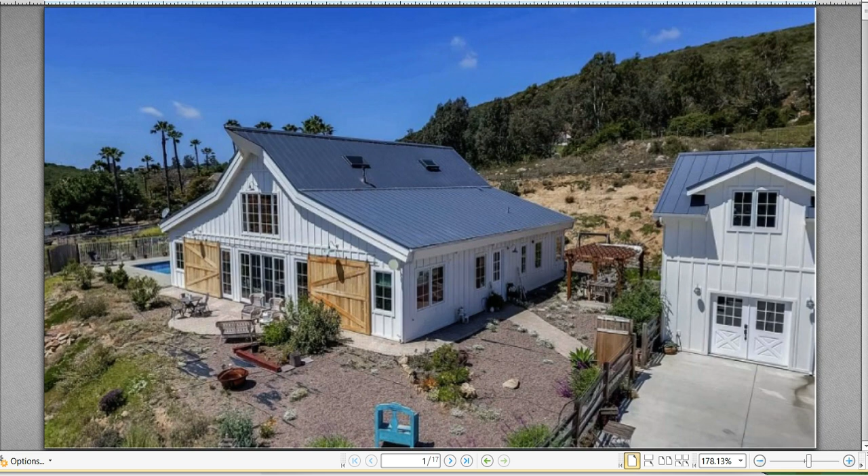Hey guys, I am really excited for today's video. I've been working on your 3D massing models for quite some time now, and I've got a lot of exciting options for you guys to consider and discuss further.

I want to start here with some of the inspiration images you've provided over the course of the project, as a reminder of how I started my approach looking at these 3D models for you. There's been quite a consistent expression for a farm style home, a barn shaped home.

With either a gambrel roof, this sort of double gable roof, or this dual pitch roof style. I took that to heart and really tried to take a lot of inspiration from these.

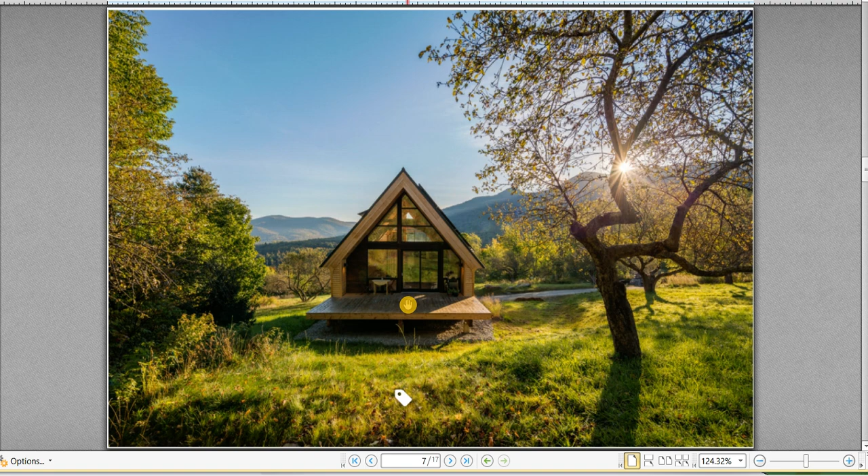And you've also got these other really interesting A-frame style homes. Now I know we discussed this previously and you said you didn't feel the need to pursue the A-frame home, but I couldn't help but explore it a little further to see if I couldn't make it work.

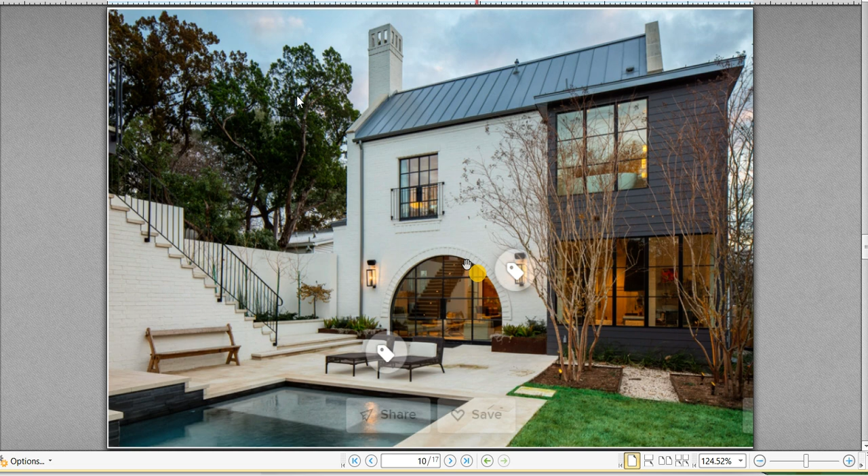You've also got this image here - I think you thought it might be quirky or fun to have these whimsical round doors. I didn't quite work this particular element in, but we could talk more about doing rounded elements like that elsewhere. This image here...

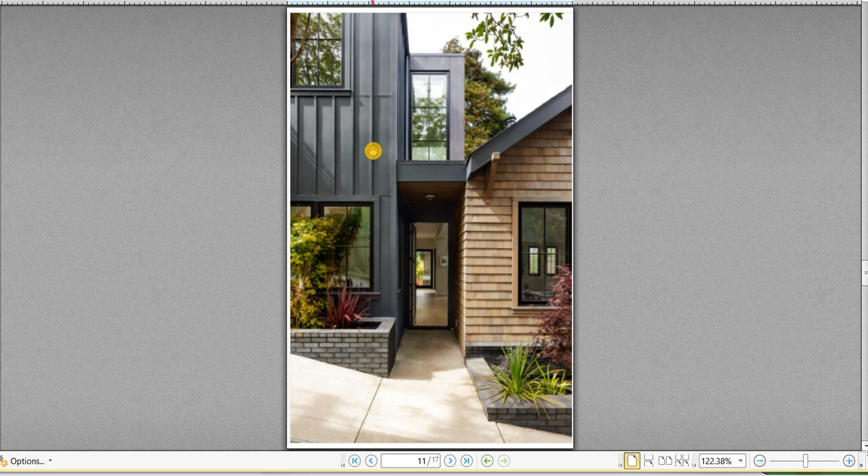You're going to find that I definitely fixated on this as sort of a color palette. I've got a pretty consistent theme going where I'm using these tan colored shingles, whether real wood, which I wouldn't recommend given your...

wildland urban interface, your fire hazard zone that your house is in. I'd recommend going with a stain grade looking artificial shingle, like a cement fiber shingle. That would give you a layer of fire defense better than wood, but still the shape, texture, and color could be very much like this.

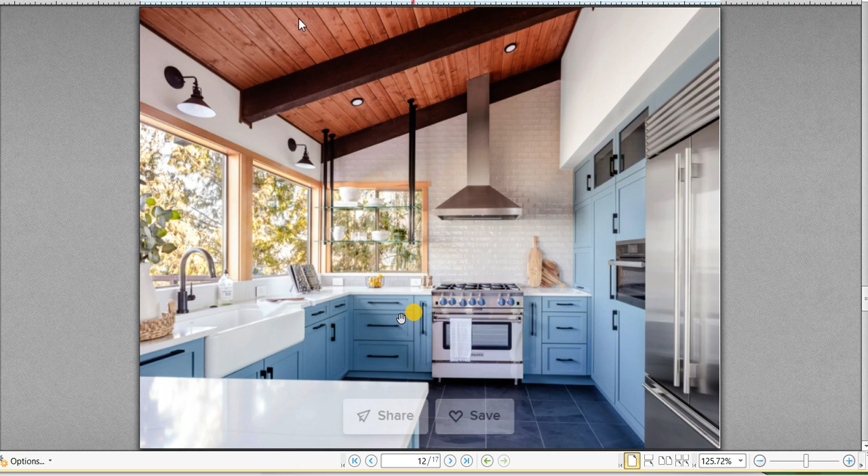And then some vertical board and batten, colored darkly, perhaps a dark gray, again made out of fiber cement. And then lastly, maybe another color of this material, but in a blue theme, because I noticed again and again that a lot of your images talked about liking light blue.

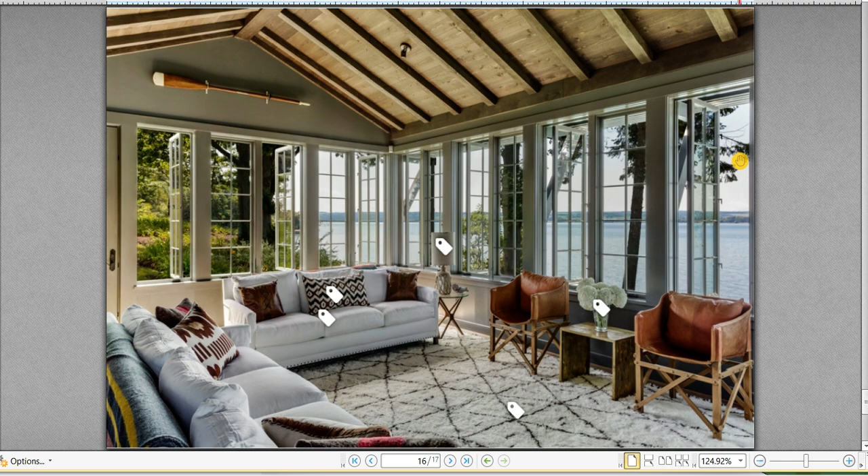Some interior shots for just some really nice colors, really grand gestures here - big walls of glass, lots of glass, very interesting, vaulted ceilings. Really gorgeous images here, and I want to thank you for providing these.

So now let's take a look at where we were with the floor plan that we had developed. I know there are a few things we're still iterating on, specifically with regard to lengthening this room here. I think we should talk more about that.

But this was the basic layout that we had, with entering in on the great room that's meant to be vaulted or very tall, bedroom wing off to the left, garage, playroom, mudroom here, and then of course the detached ADU.

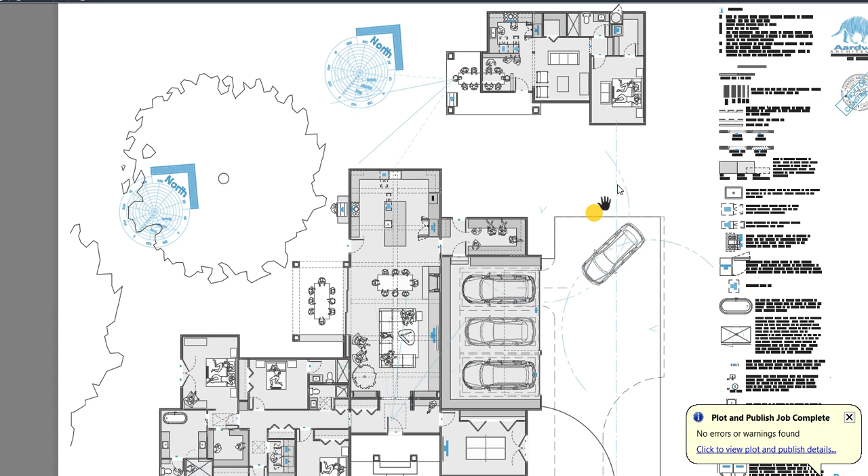I didn't get into exploring the shape of the ADU. I'd like the ADU to take its cues from the decisions we make for the main home. So it's really just blocked out, and I haven't even studied yet whether the porch should be on the left here or at the front here. Let's figure out what we're doing for the main home first, and then this will copy that.

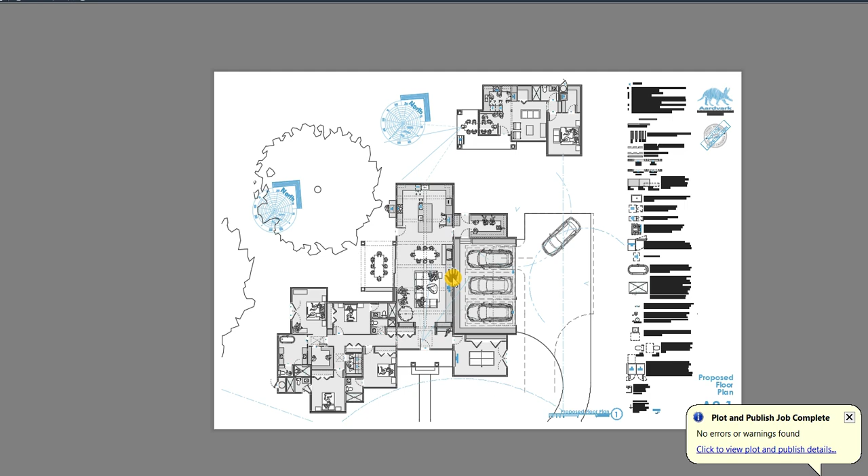Okay, so let's jump into the 3D models. Okay, hold on, so we're supposed to start on this tab here.

So what I've got for you are 5 different studies that I think are worth exploring and discussing in terms of pros and cons. And then I'll take your feedback and we'll generate the next scheme that may be a hybrid of some of these different ideas.

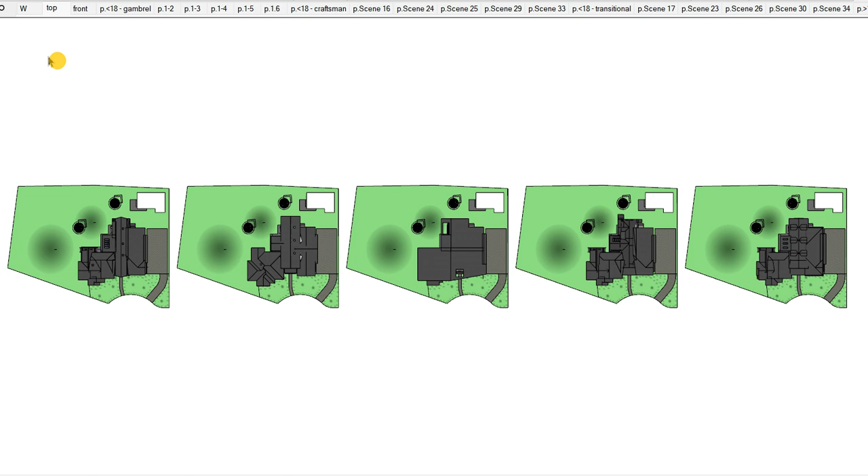We'll see. So we'll come down here to the front and then zoom in on study number 1. Again, I couldn't help but fall in love with the idea of doing a Gambrel style home for you. I really like sort of what we're seeing here.

It is right at the 18-foot height limit that the city defines, which gives you about a 16.5-foot interior ceiling height from the finished floor to the underside of the ceiling, which I think is really great.

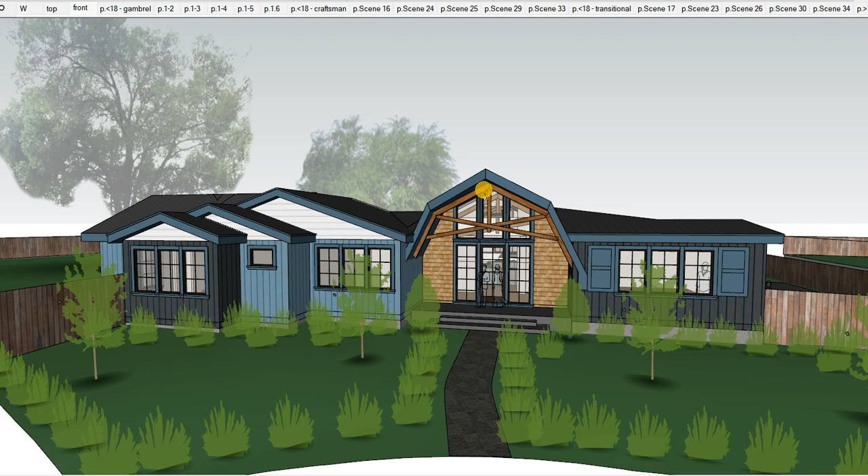I think, though, this does stand out as a bit different from the neighborhood, and so if we do exceed the 18-foot height limit, we might have a tougher time getting this approved. I think it's really interesting though, so I'd love to get your thoughts on this.

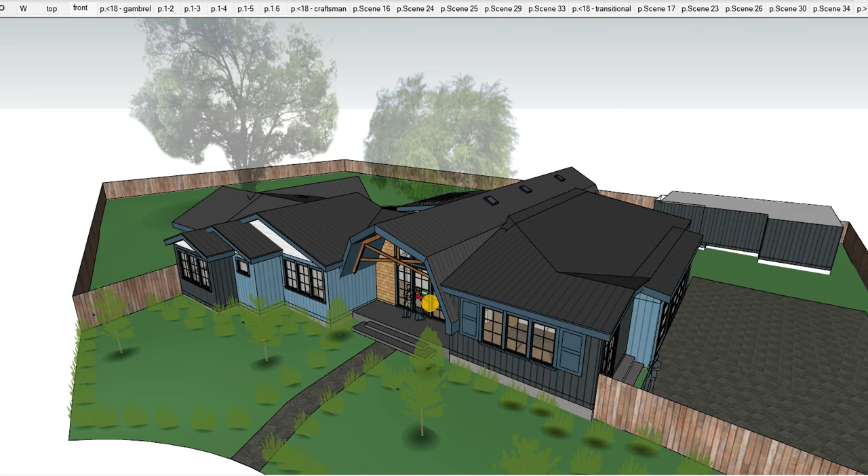As we look, we've got the bedroom wing over here, and I've really tried to take cues from the neighborhood on how to roof it. I think tying in with some simple gables or hip roofs would be the right way to go there. You'll see that as a general duplicated motif for the other studies.

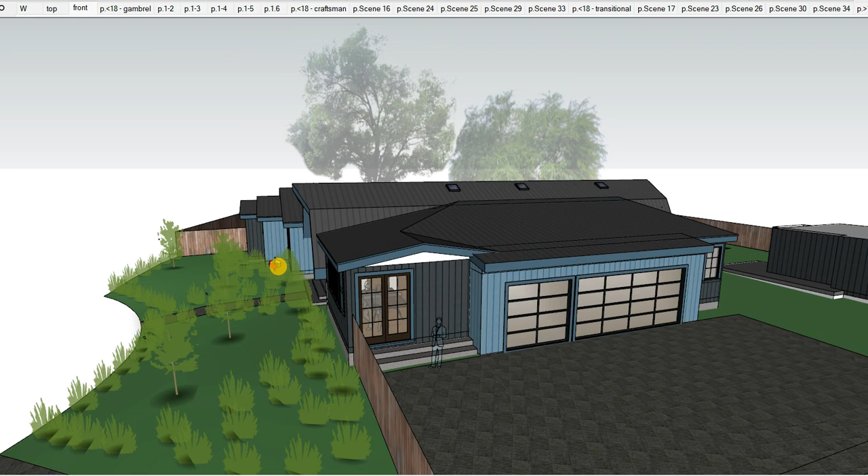Here we're seeing the flex room and the garage. A couple different ways this could be done as well, but I think it's important that this area takes its cue from the purpose of the main room or the great room roof. So more on that to come.

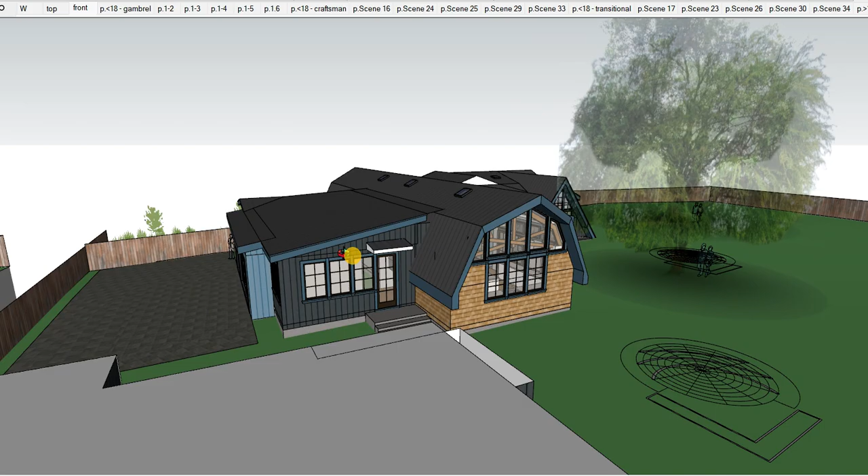Here at the back of the kitchen, I think this is really phenomenal - a really special home for you guys.

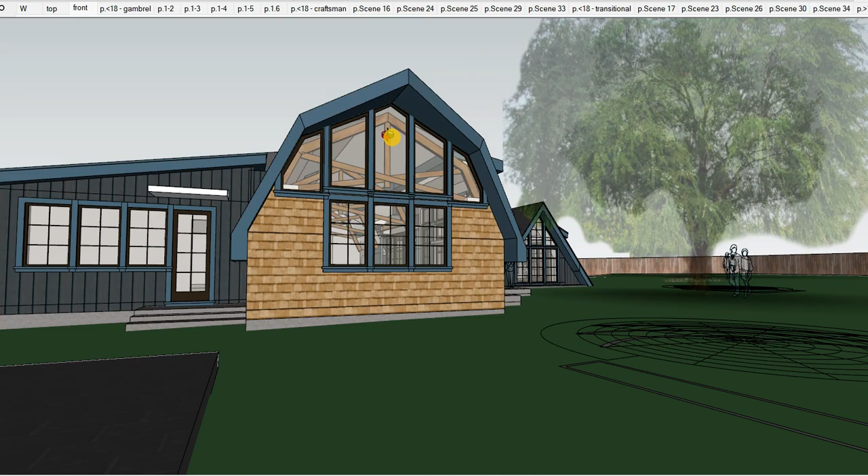The concern I have is that the images you've shared with me look more like converted barns rather than building from the ground up. So maybe it's something you ultimately don't want to do. But I still wanted to show it to you because I think it's really cool and quite feasible.

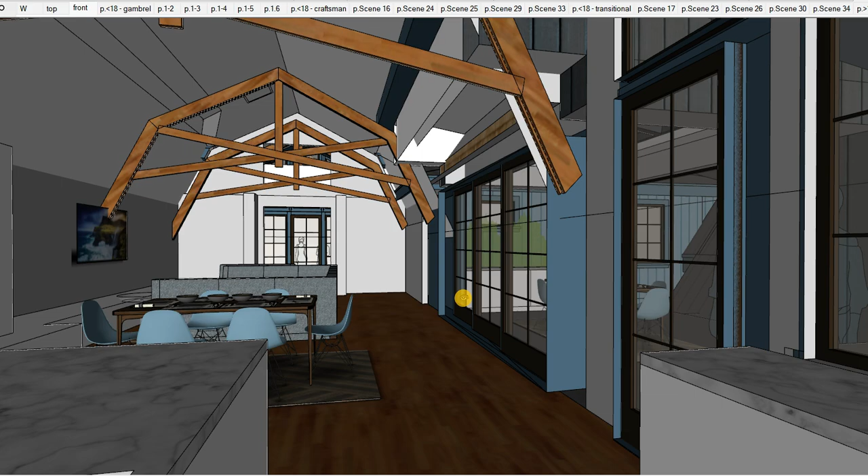Now, I don't want to overpromise on the interior aspects of this. There's a lot of cleanup that has to be done, but just as a concept of building this and expressing some trusses, adding some interest to the interior rhythm of the ceiling could be really special.

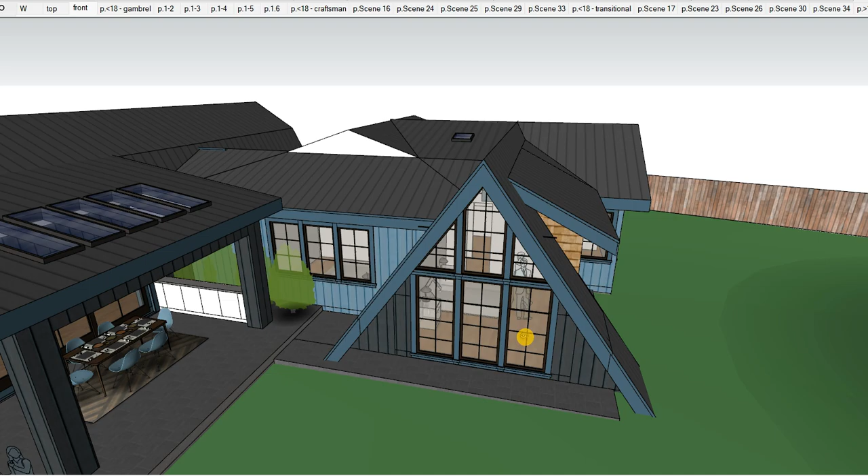Another element I wanted to incorporate was the A-frame element of your inspiration images. So I thought a perfect place to do that as an accent would be the master suite. You'll see this again and again copied. There are other ways to do this, but I really think this is special. These little wing walls could be extra storage cubbies accessed from the interior, although you might want to reserve this length of wall for furniture. I think it's really cool.

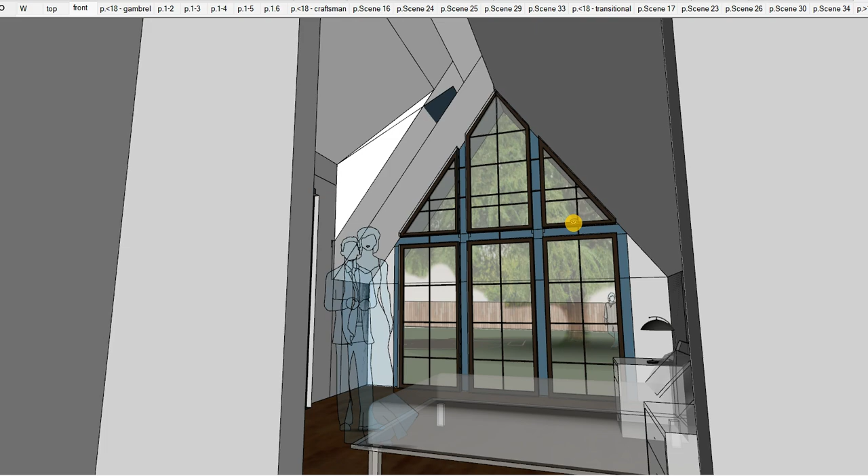And it still gives you some pretty dramatic spaces and views, of course. Something I've been talking about for a long time would be the view when you come in from your master vestibule and you look out and see that oak tree. I'm so happy with this as a concept.

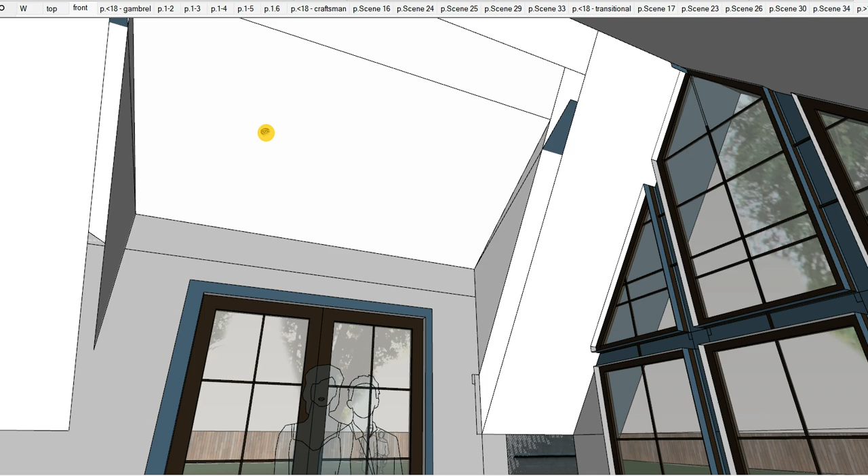And then, looking out here, I'd love to have a big skylight right here. I think sitting under the crown of this oak tree, it would be a shame not to look up and see that. But I know you're a little against skylights, and I don't blame you—that's the first thing that's going to leak in the house, it's going to be the skylight. But when we've got an impressive canopy to look out onto like this, I think it's worth doing sometimes.

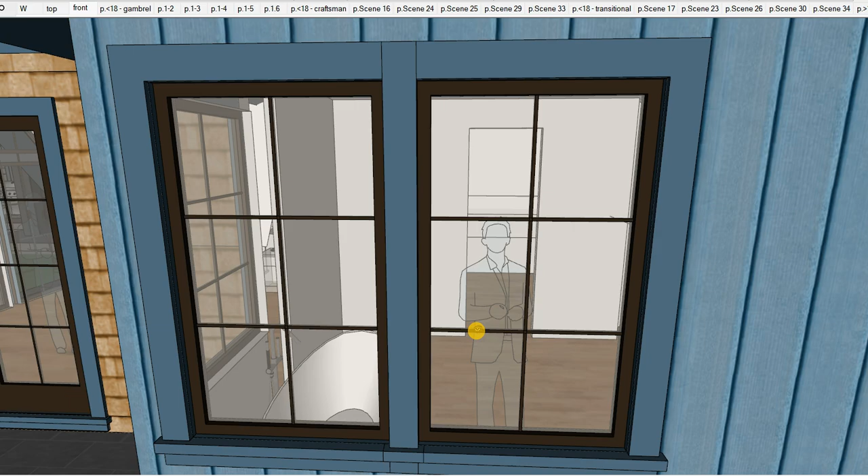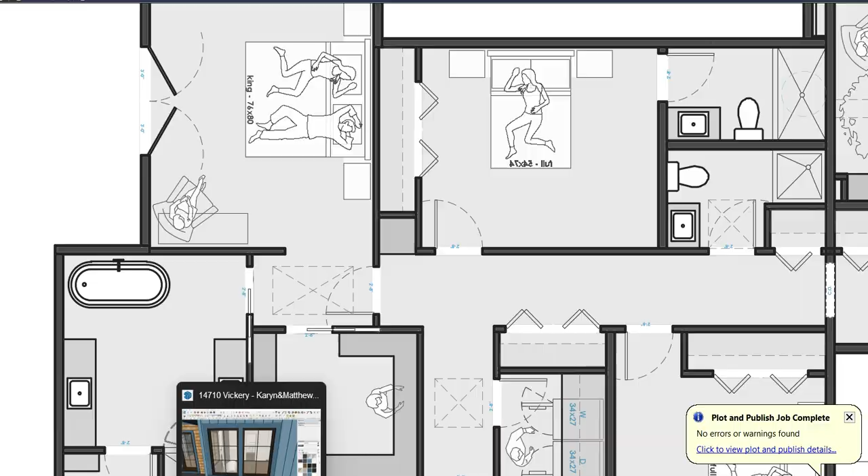A couple windows at the tub here, and we could do some of those bottom-up shades, so I'm not concerned about privacy, although I do want to talk about the access into this room. I don't know if you recall from the floor plan, we've been showing the door into the tub directly across from the tub. I feel like this is worth exploring—that we move this door down, because I don't want to turn the corner and look down the open door and see your tub. Even though it's going to have a nice view beyond, I think it'd be better if this was solid wall with a piece of art or mirror on it, but we could talk about that in more depth after we fixate on an exterior look here.

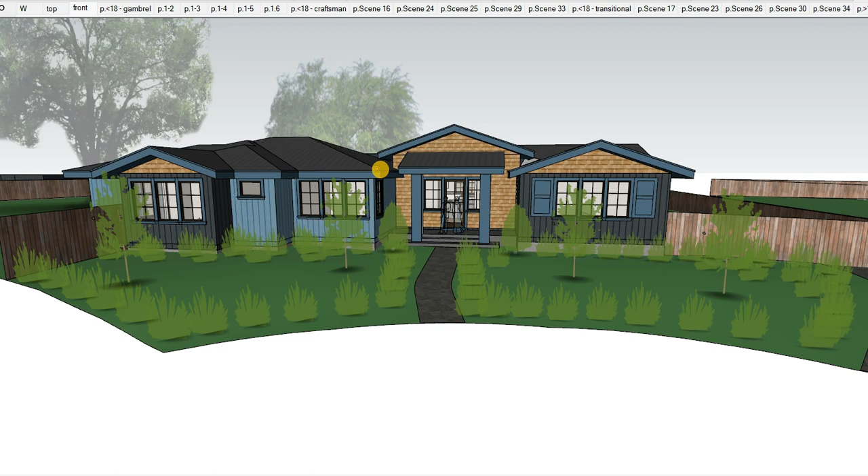So that's about it for this scheme. Let's move on to another option, which would be a far more traditional, neighborhood-contextually sensitive design where we're really just relying on hips and gables. And we're staying under 18 feet still. This is not as exciting of a design, but it's certainly probably the simplest one in terms of the approvals process.

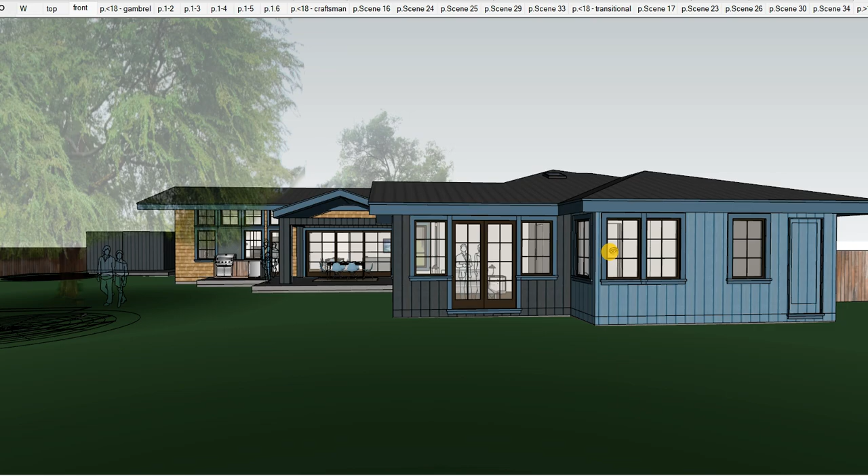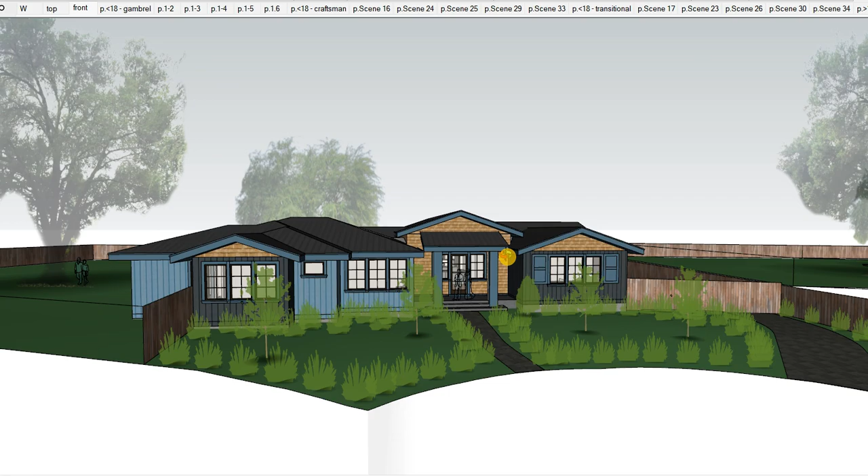This is a fantastic home. There's nothing here that I would say would be a mistake or a misuse of this opportunity. But it's certainly playing it safe. And I think, as we've talked about before, we're more interested in getting a final product that is great for you guys. And if we have to go through a longer approval process, so be it.

But some of the designs I'm going to show you might be tough to do when we go through that sort of process—before we move on here—might be tougher to do when we start looking at more extreme designs that are taller.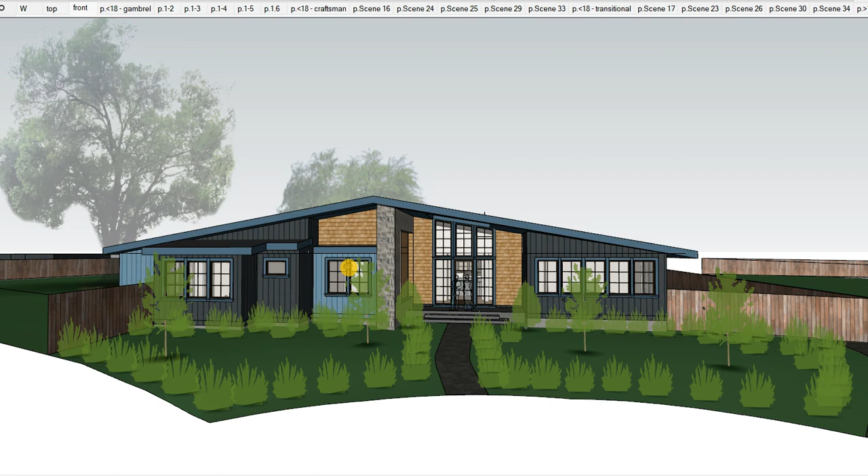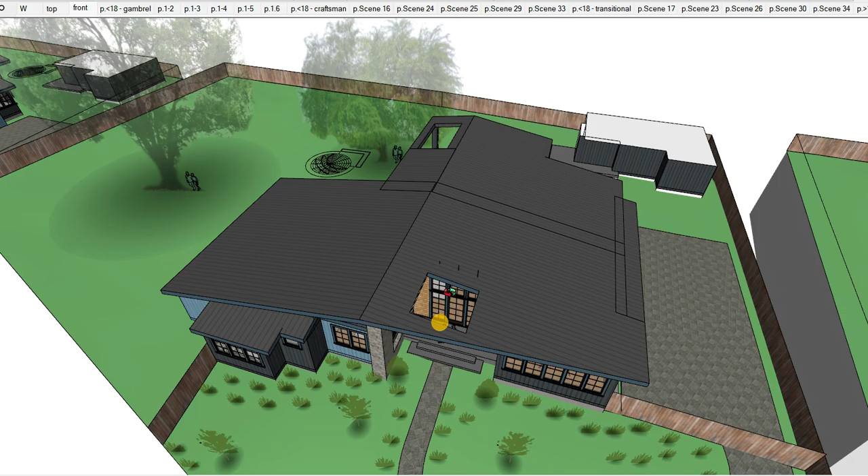So here's one more option, and I think this one's probably a bit of a throwaway. This is study number 3, and I'm calling it the transitional design. This has the simplest roof—one large gable roof at a 2 and 12 pitch to take advantage of that metal roofing you've already expressed interest in having. It's going to be the easiest roof to build and the easiest one to maintain. It gives you so much southern-facing roof exposure for solar panels, but I doubt this is at all your cup of tea based on the images you've shared with me.

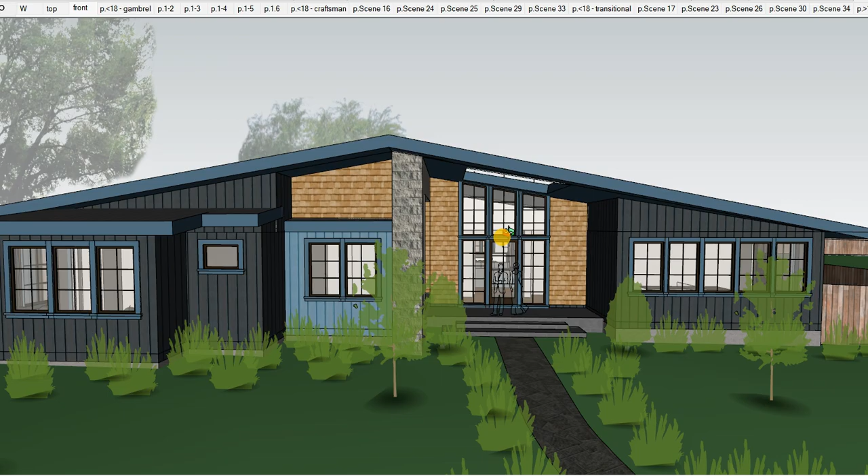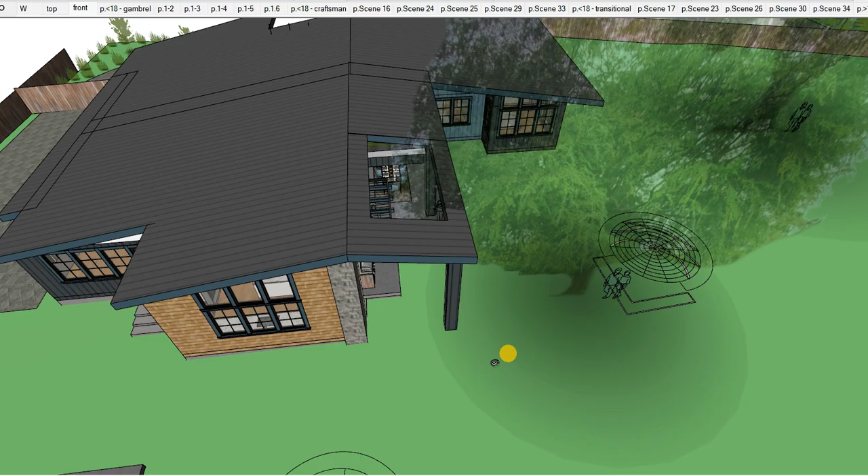However, I think there's some merit to it. There's certainly a lot of different ways we can tweak this, but I had to try—I had to take one crack at it. One thing I really don't like about this one is that I felt compelled to bring this roof return all the way over here and support it with a post, but that's within the drip line of this tree here. If we wanted to go this route, we'd have to get the arborist to look at that and give us his advice. That's only if you even like this sort of design idea.

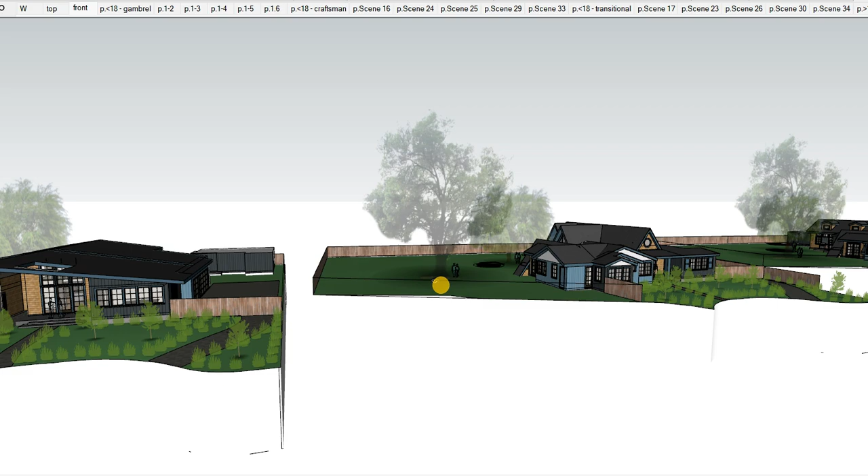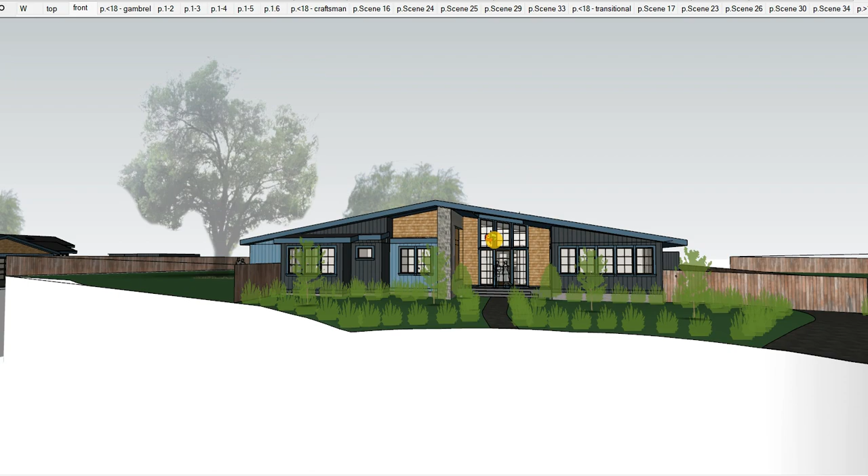So here, setting this at 18 feet would mean less design review oversight. There'd still be some at the staff level—they could still say this giant single peak isn't in keeping with the rest of the neighborhood, which relies more on having a bit of a hip roof at the front. But there's only so much they can do at that level.

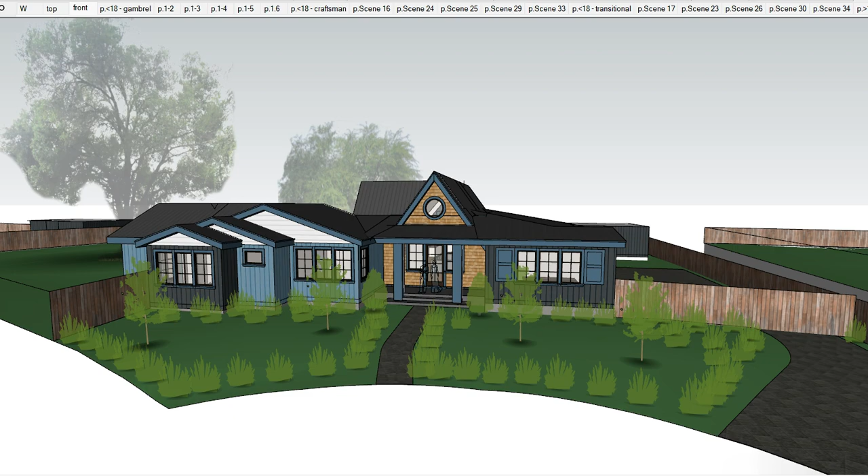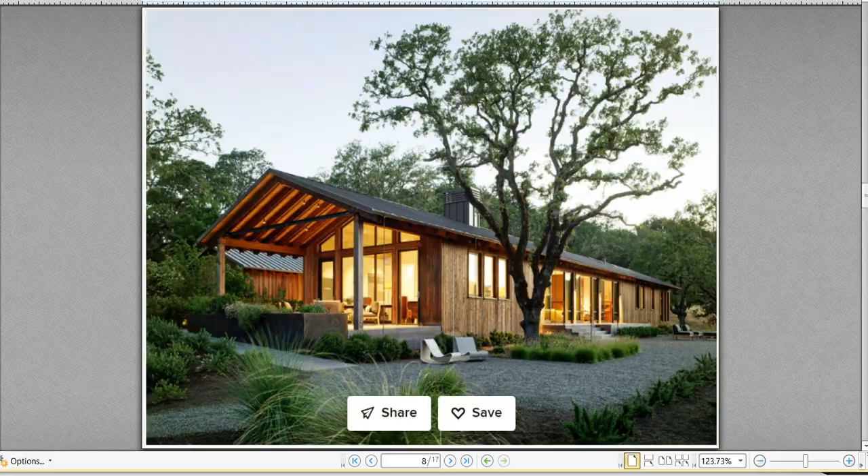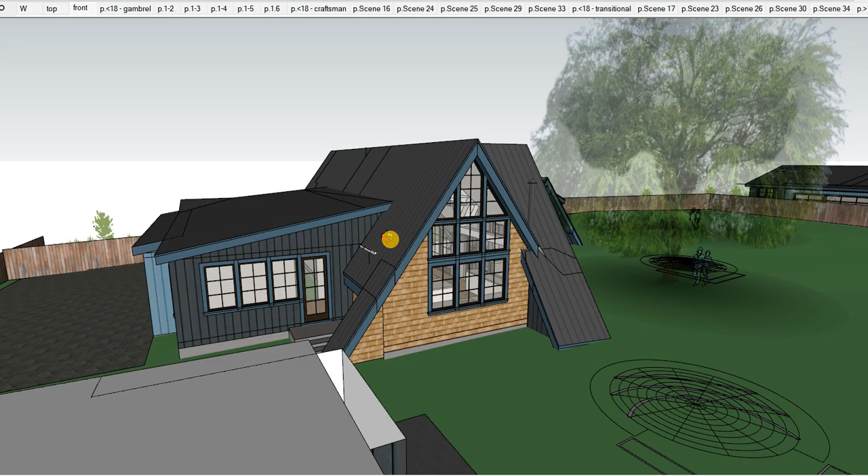That if you wanted to do any of these three designs that are less than 18 feet tall, it should fly through pretty easily. So here's a design where I really took the A-frames you guys were showing—you had quite a few images with these steeply sloped roofs with glass going all the way up to the ceiling. I really wanted to make something like that work, and I'm excited about this design. Here we're seeing the tip of the A-frame peak expressed all the way up to the front of the entry. As we turn the corner, we start to see the A-frames happening at the great room, not just the master suite. I really like this—there's a lot of interesting things going on. Of course I started like I've been doing with the great room vault running this way, and built up all this tall glass here.

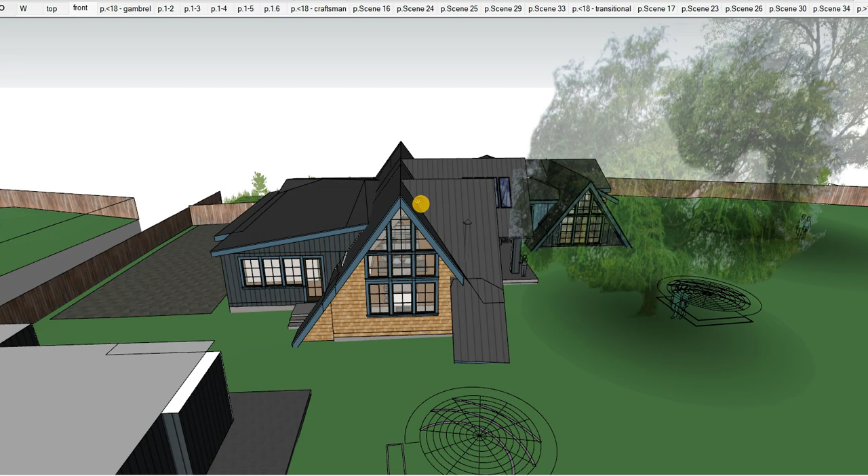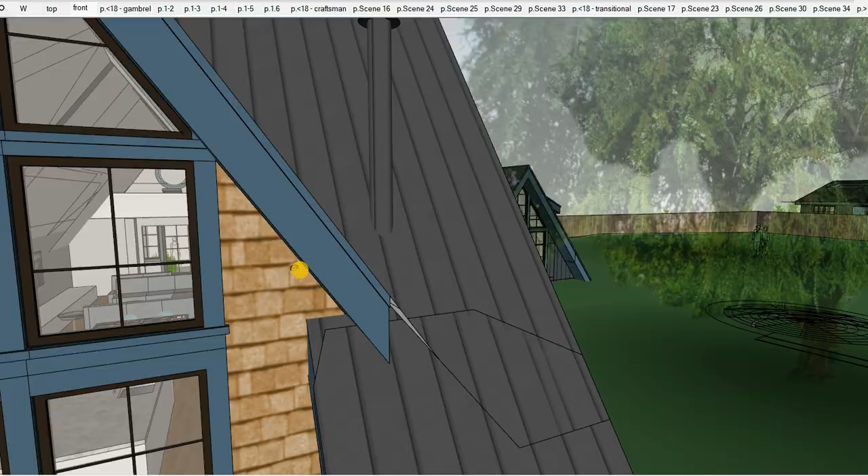When I was standing inside the space, I thought, gosh, I wish there was that tall elm tree right here—I'd love for this to be looking out this way at that tree. So I quickly mocked it up. I said, what if I turned this face, what if I copied this face and did a cross gable? I think it's very interesting—perhaps taking that A-frame design and elevating it into more of a transitional feel, because there's a lot of contemporary things happening here, where we've got one coming down to the ground but stopping short here.

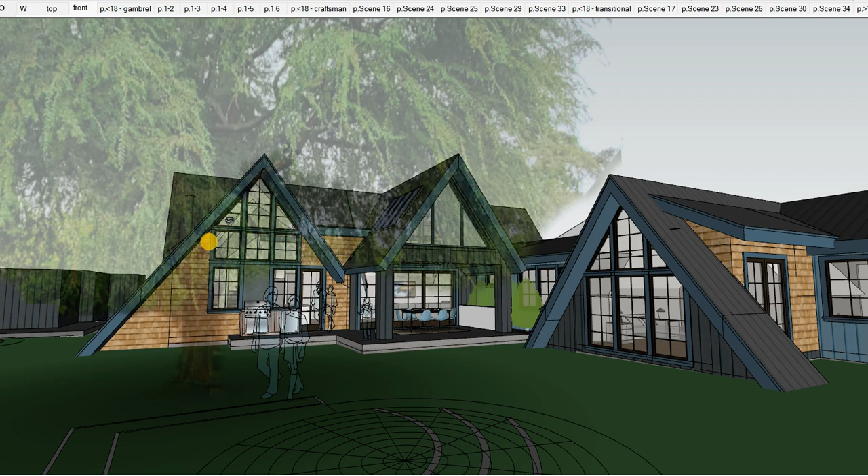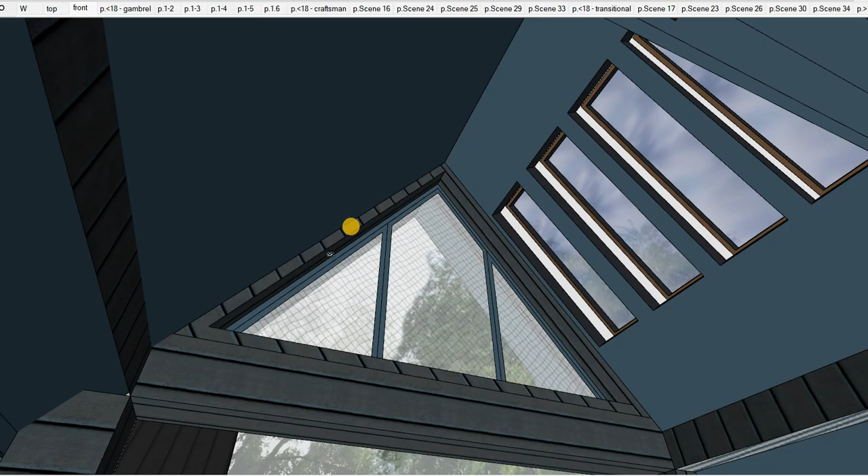Then the giant A-frame at the covered porch, where now we've got a really tall thing happening at the porch too, at the dining room, where you look out and see there's still a lot of structure. I'm not entirely sure if capturing this tall of a vaulted space for the covered porch is appropriate, but I absolutely love it here at the kitchen, and of course at the master suite too. So I thought it would be interesting to try that here and get your take on it.

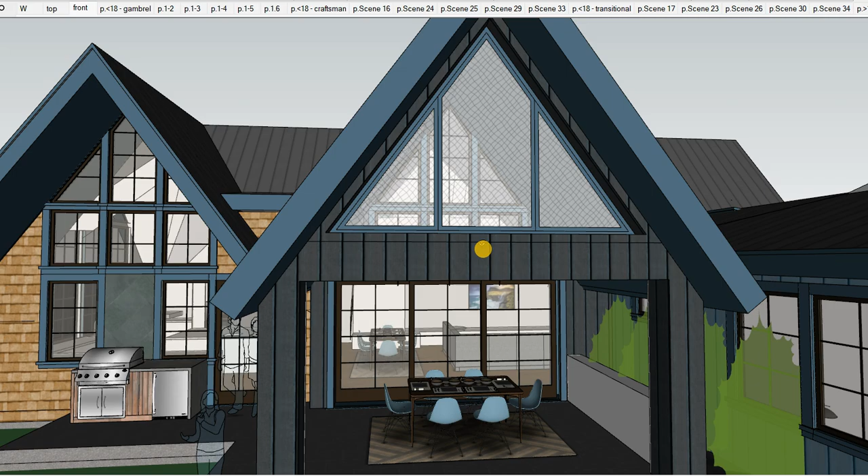This would be a solid screen that's always in place, and then the drop-down roll-down screens would drop from here, from this soffit, and another one here to close off these three elements. This could maybe even just be a solid screen that's always down—we could talk about that.

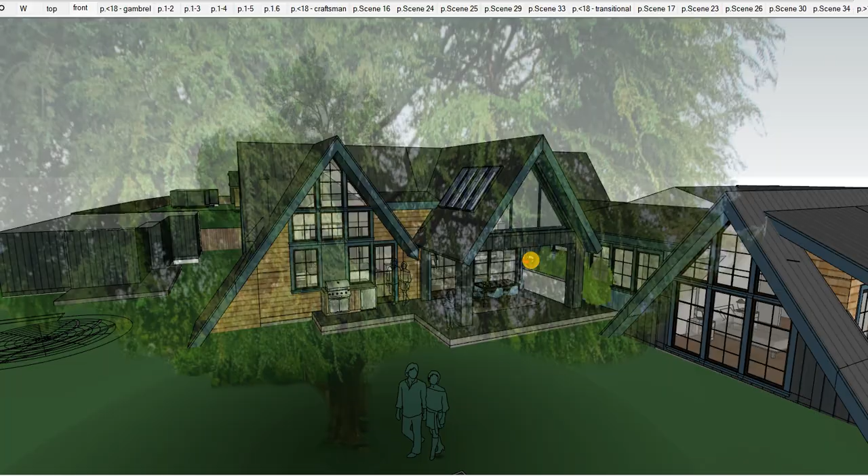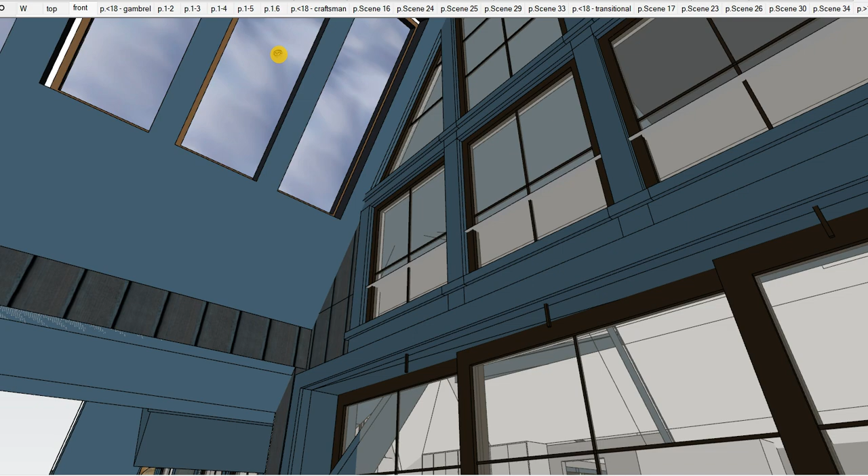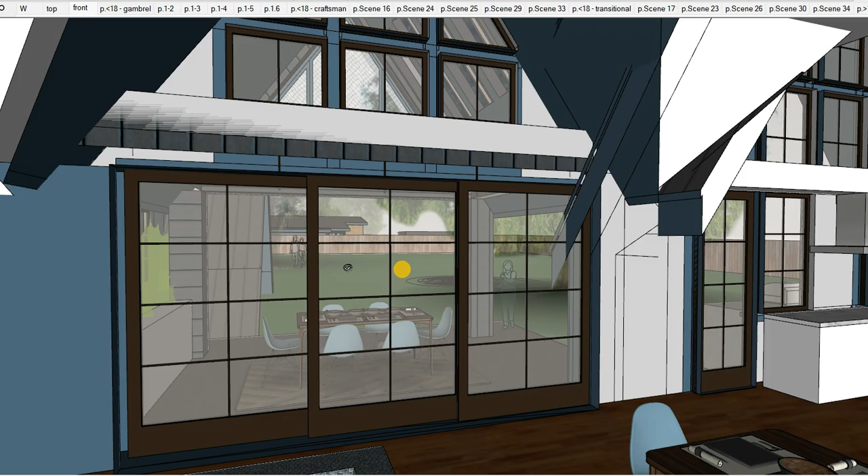I think this is a really interesting concept. When you're sitting here at the head of the table in the covered porch, I'd feel like it'd be a shame not to have this be really bright up here. So these skylights would be part of this covered porch element, so you still get a chance to see and appreciate the canopy, and also to bring light into all these high vaulted ceiling windows. It'd be a shame to just have this all be solid—like this view is fine, but there's nothing to look out at on this side. Whereas these skylights will bring a lot of light into this covered porch area and in through these huge sliding pocket doors.

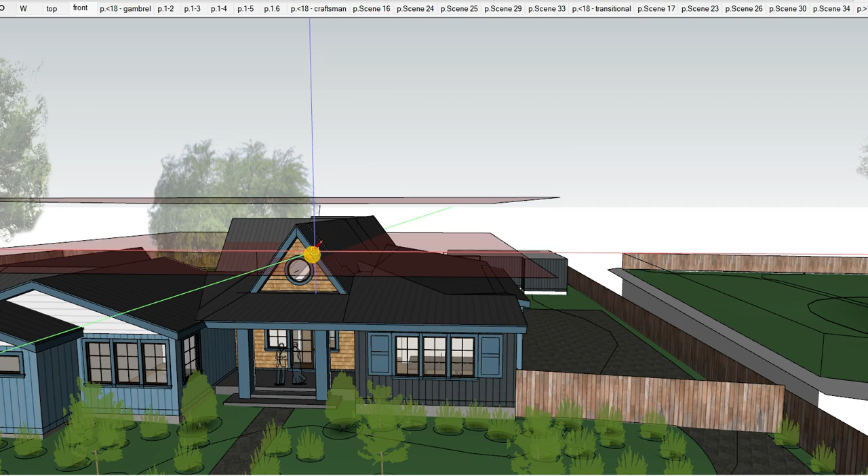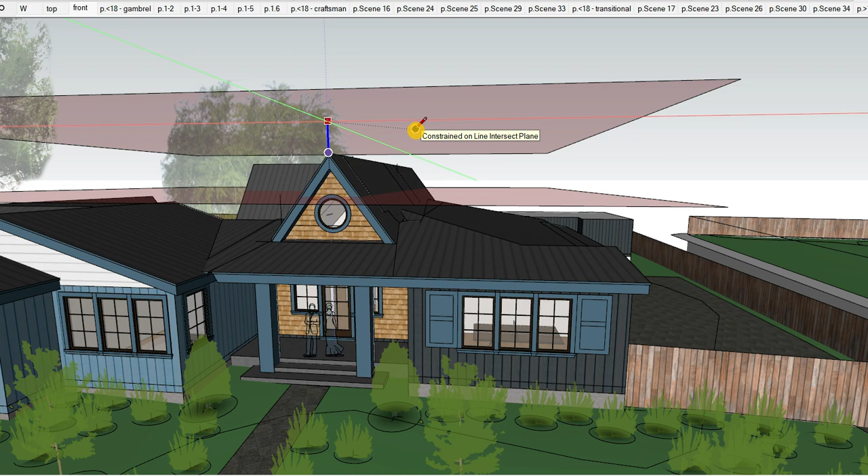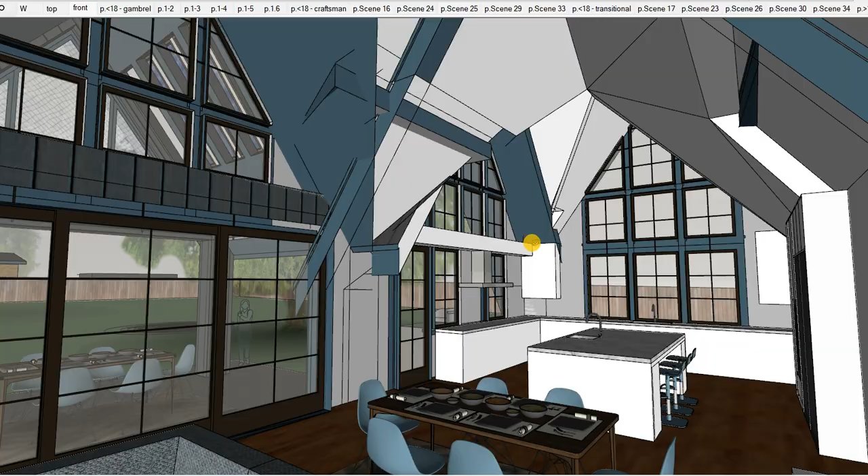Okay, so I think that's study number 4. And this one is a bit taller, right? If we look at how the city defines height, this lower red plane marks the 18 feet from the average of this grade and the average of a grade point back here. 18 feet up from that represents their maximum height limit. This one exceeds that by about 5 feet, but we're still well under the max height limit of 26 feet. This really has the opportunity for some very high expressed ceilings—perhaps too high, perhaps too tall. But I think this is something you guys might like.

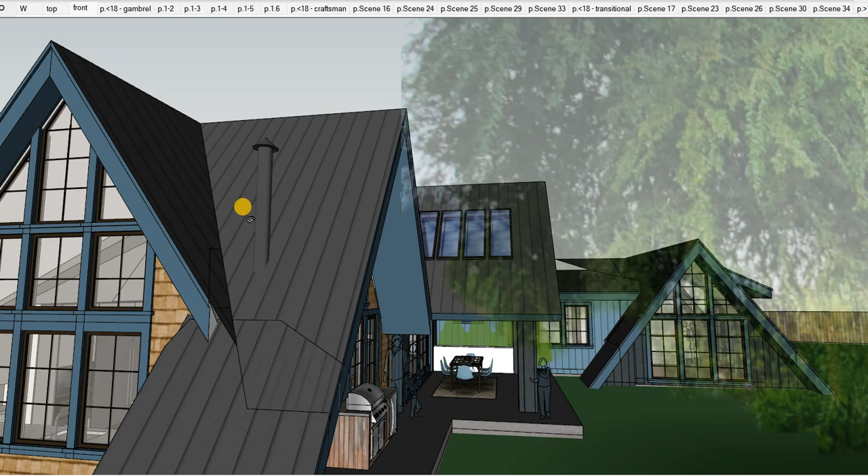So this is where the cooktop is, but there'd be some sort of cabinetry element between these windows that would duct the cooktop through a flue pipe expressed right here. I think this could be a cute sort of cabin-y type thing that's strutted and strapped. This can get a little bit taller, and it could even be painted in an accent material and play it up—it could have been this blue too.

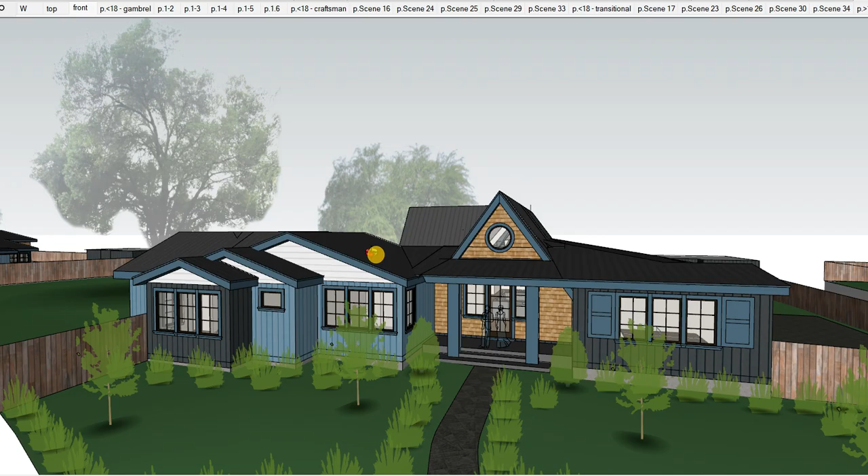I'm really curious to hear what you guys have to say about this design here. Of course, this one going through the Planning Commission and being a bit different might be a bit of a push, although I don't see who we're negatively impacting here.

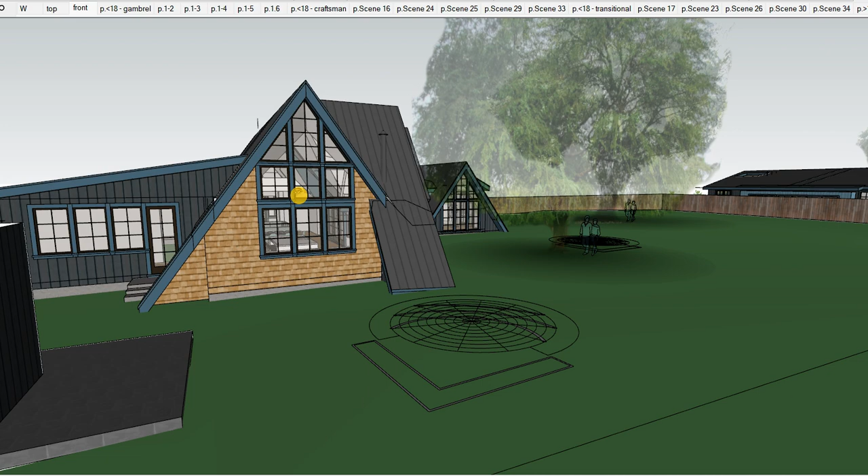It's single story, super tall, but single story. There's not a huge impact to the neighbors' privacy. By having these super high windows here, no one's standing up at this level looking out. You're still just standing at floor level here, looking out at the fence. That's not too much of an impact on their privacy.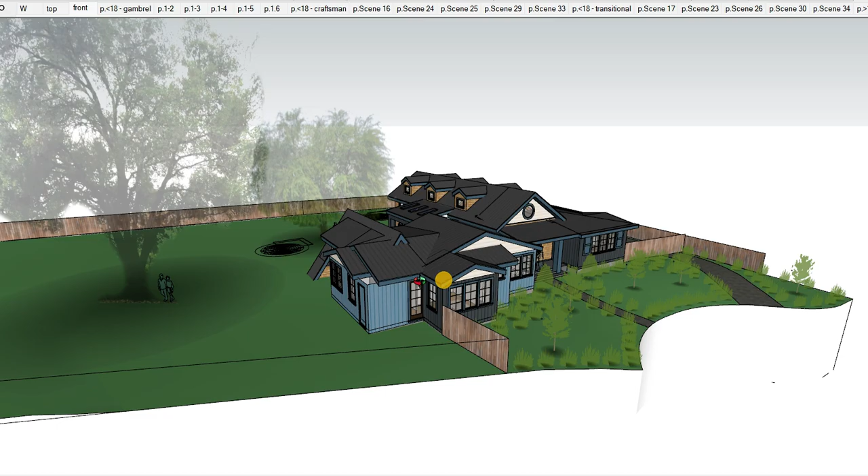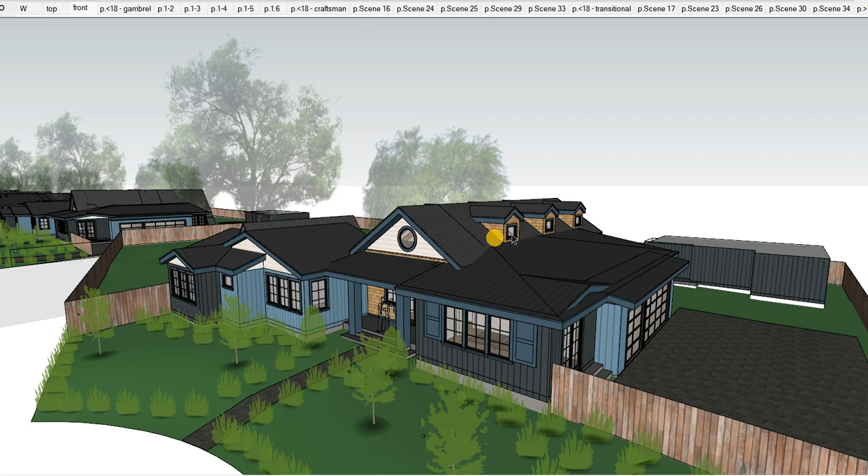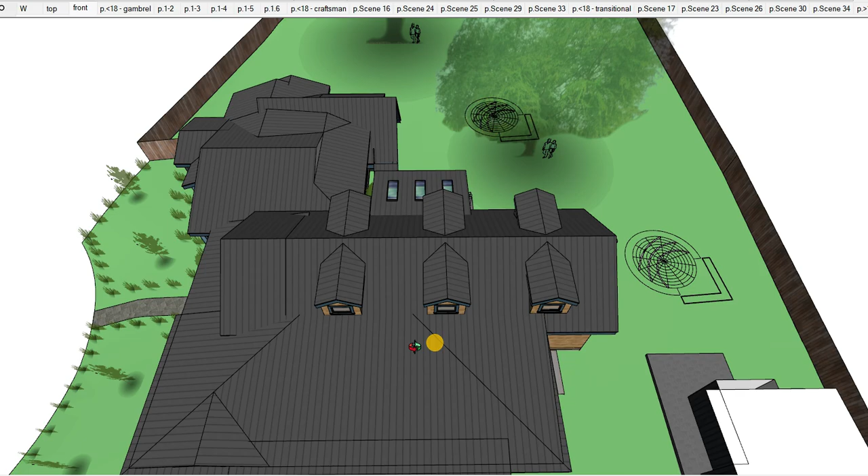So this next design takes the simpler, less extreme approach for the roof. This looks a little like that safe Craftsman version I showed before for study 2, but it pops up. It says let's make sure we can work some dormers in. So let's pop this up to a height above 26, or above the 18, by about 3.5 feet. But doing so, and going with an ultra low slope 2 and 12 over the garage area, does allow us to get these 6 dormers equally spaced inside the great room, and I think that could be pretty cool.

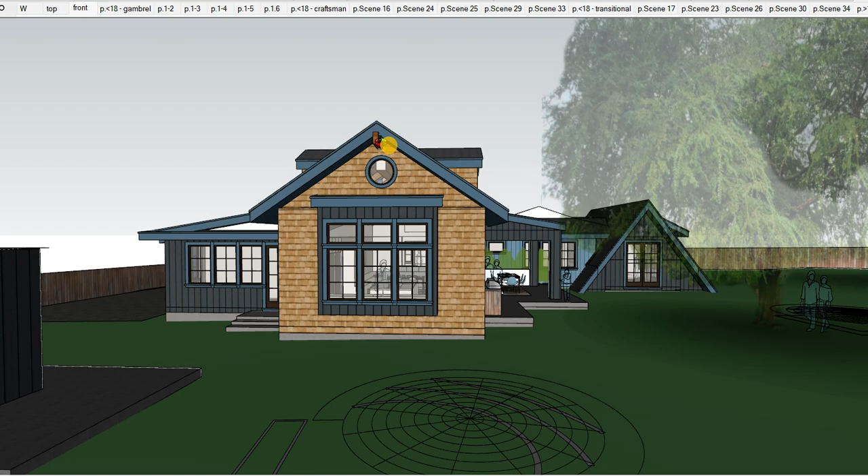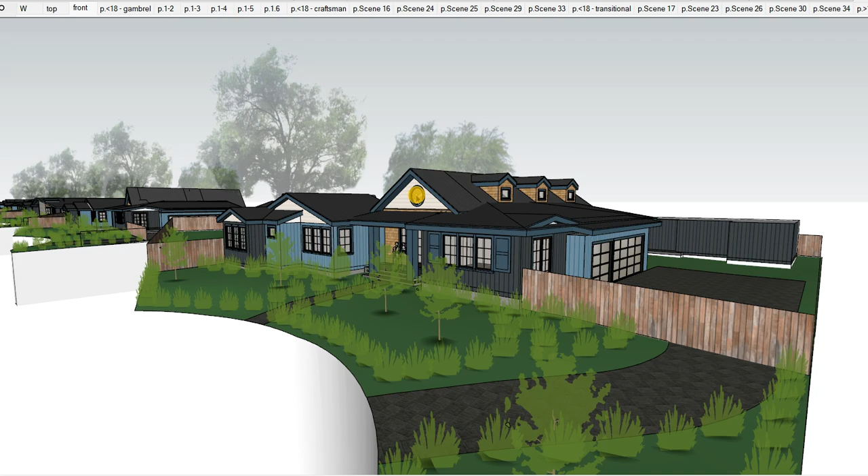This one's okay. Based on the images you shared, I'd love to hear your thoughts on the A-frame, but this one's also really great, perhaps a bit safer, because the roof slopes aren't as extreme, and with the same logic we used for the tall A-frame home, this extra height isn't really impacting the neighborhood too much. We've got a lot of low sloped, low single story elements surrounding it, and we're pulling back the tall elements far from the setbacks. So I do think this should be good to go, or easier to get through the Planning Commission with. But that's just a really soft opinion there.

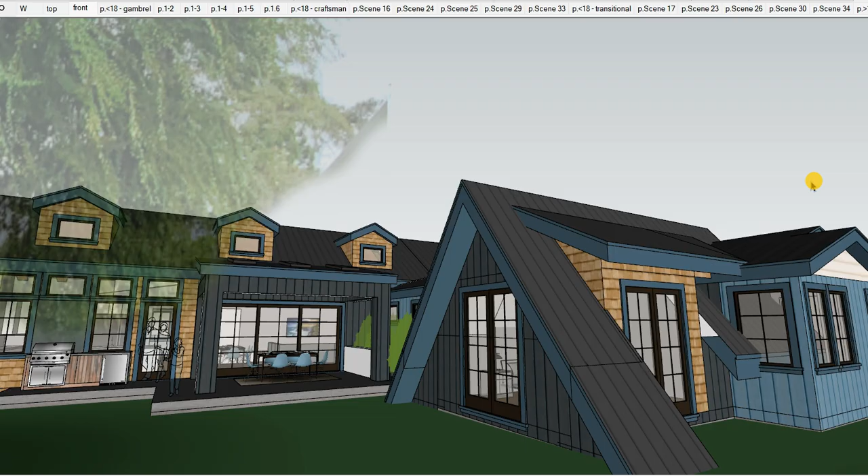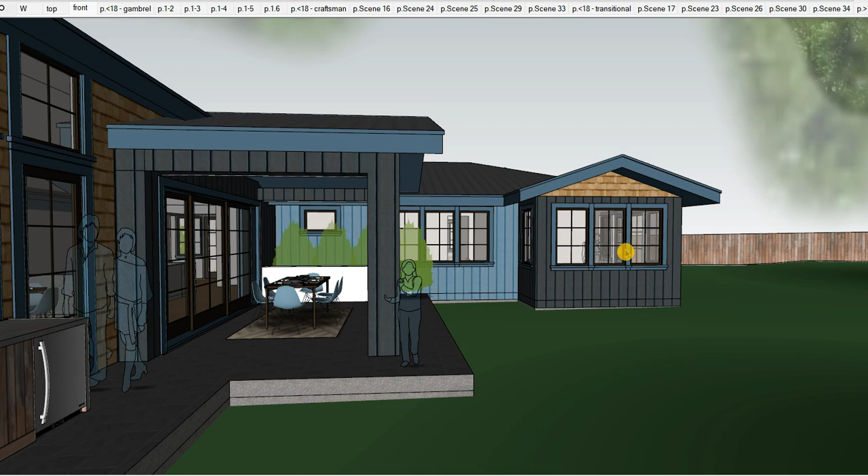I thought I had another option where I had just a very standard master suite for you. Here it is, yes, I didn't really talk about this. So back at that less than 18-foot height version, here's a version of the master suite, along with the contemporary or transitional version, where the master suite is just a bit more standard and not so A-framed. There's nothing wrong with this. This could certainly have a nice vaulted ceiling as well.

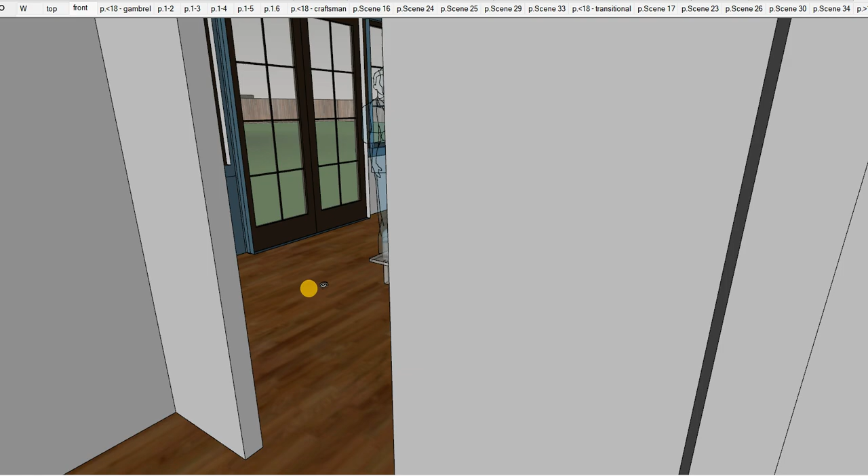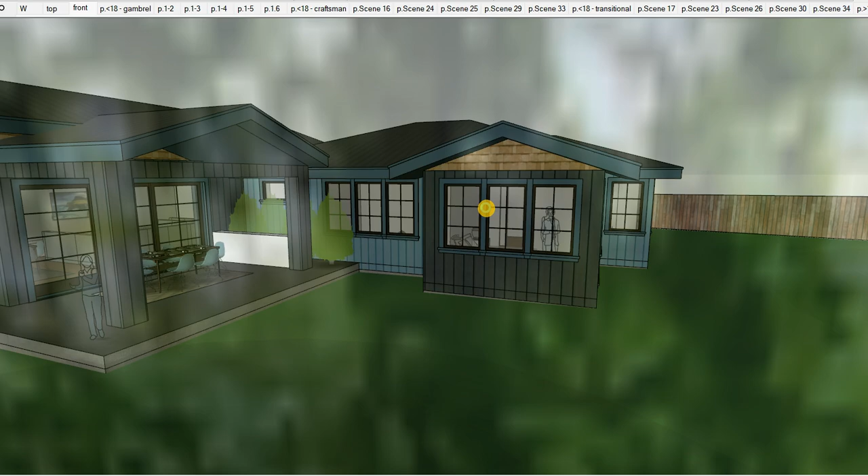Oh, a little lost in the model here. Okay, here we are in the master suite again. This could have a vaulted ceiling in it and have a lot of height, even though it's taking off from a 9-foot wall. And then we can fit some triangle top windows there as well. So this could still be built up and improved upon. But here's just a simpler version of what that roof shape could look like back here. It doesn't only have to be the A-frame. I know I kind of went a bit overboard on this one.

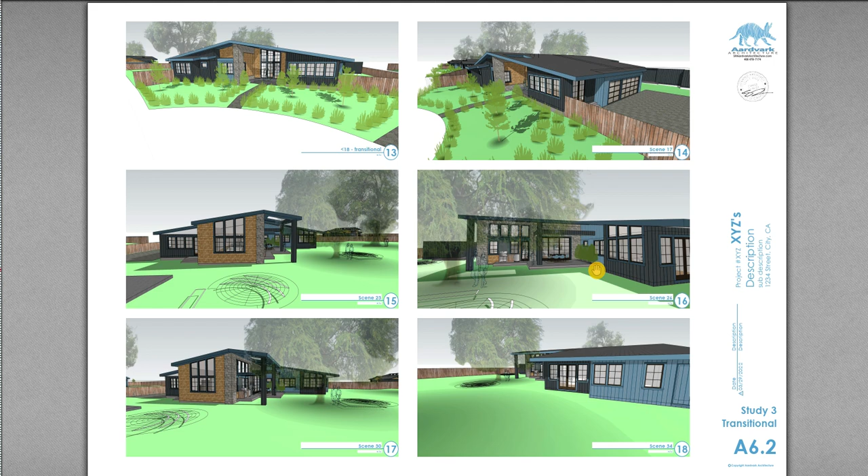But I do think there are quite a few really interesting options for you to consider here, all based on the same floor plan. You're going to be getting a PDF that shows all these studies with more or less the same viewports, or perspective views of the different model options. So again, there's that less than 18-foot Gambrel roof, the farmhouse looking roof. There's study 2, the less than 18-foot Craftsman style home. A very simple roof, less than 18-foot, just 2 in 12 over the whole thing, but with super simple roofs to install. Transitional home. Study 4 would be the A-frame house, and study 5 would be the Craftsman style home that exceeds the 18-foot height limit in order to get these dormers expressed inside the great room.

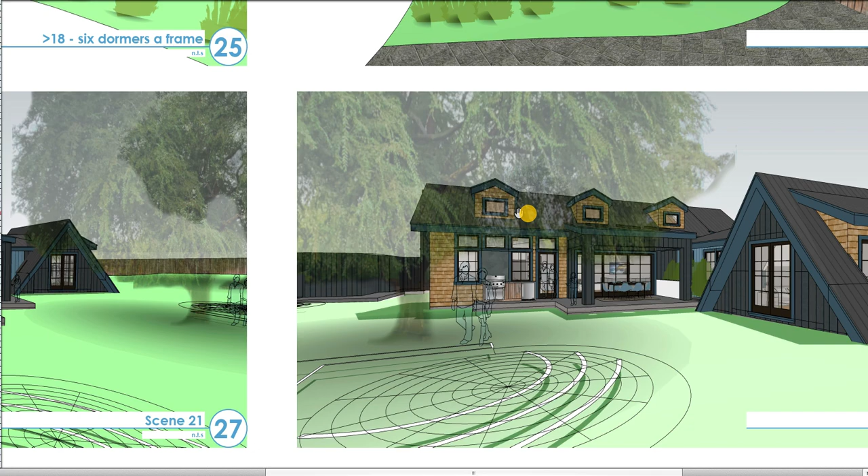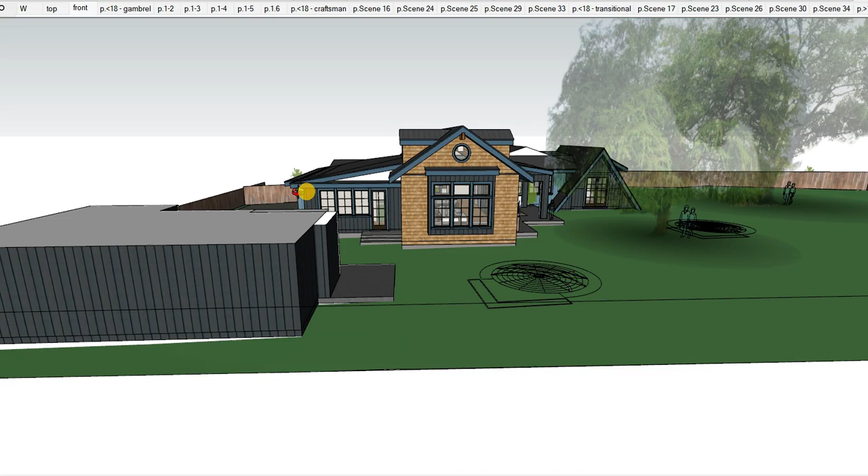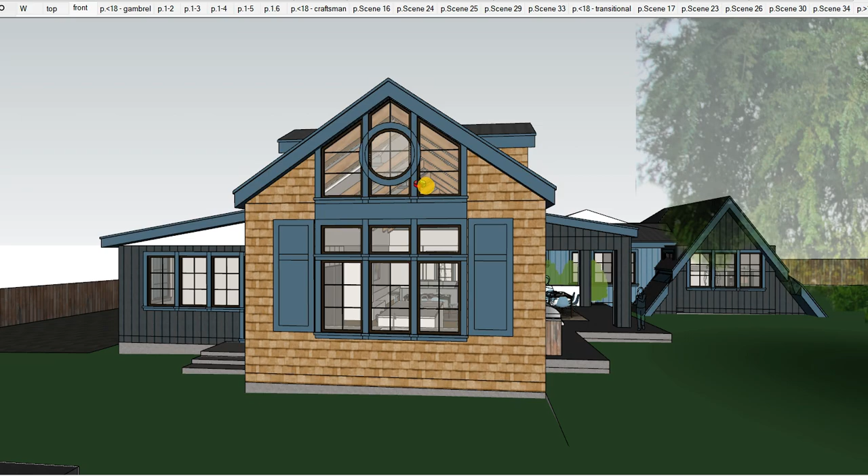Another thing I thought would be interesting, which I didn't talk about, let me bring up the model again. I thought it'd be interesting, if we do this extra height back here, maybe instead of going all the way up with more glass, it would be nice to emulate what we're doing with the circle window at the front, circle window at the back, and then do a pop out here, a little bay window, a very big bay window, giving you an extra deep countertop at the sink area, which might be kind of nice. Of course, there's other ways we could do it too, such as taking the glass all the way up to the ceiling again, incorporating the circle, and doing something a bit more whimsical. So lots to review and discuss.